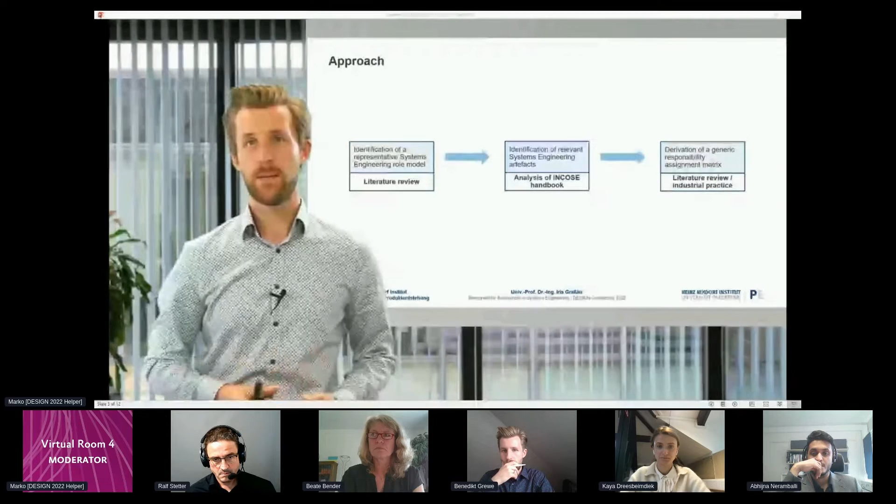Within our approach, we started in three steps. First, we identified a representative systems engineering role model on the basis of a broad literature review. In a second step, we identified relevant systems engineering artifacts, doing an analysis of the INCOSE handbook. In a third step, we derived a generic responsibility assignment matrix based on a literature review and our industrial practice.

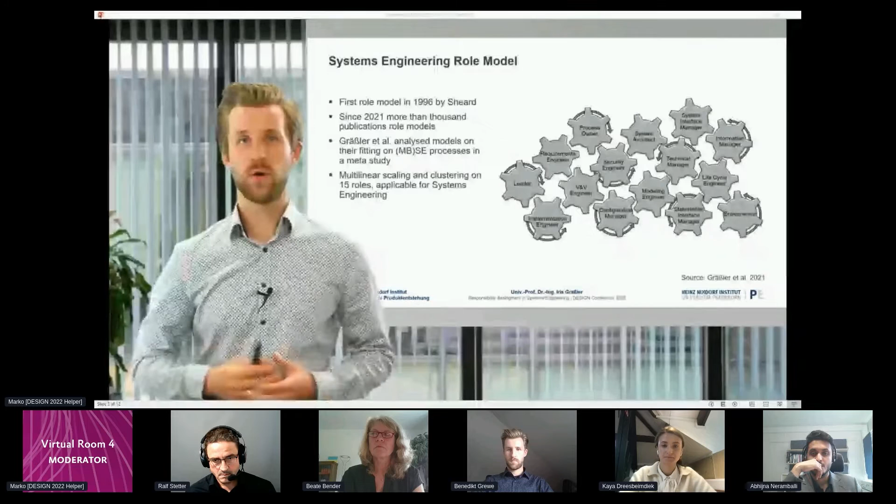The first systems engineering role model was published in 1996 by Sheard. Since then, there have been more than 1,000 publications of role models. Gräßler et al. analyzed different models on their fit with model-based systems engineering processes in a meta-study, and with multilinear scaling and clustering, they came up with 15 roles applicable for systems engineering.

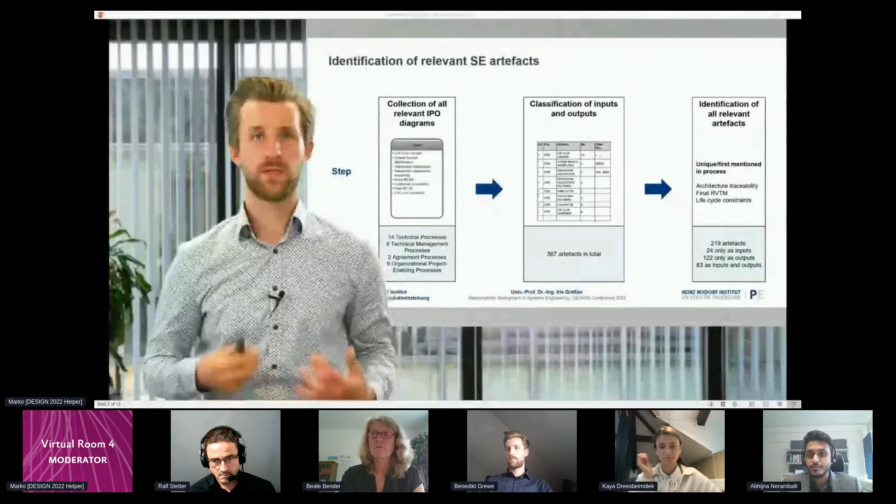To identify all relevant systems engineering artifacts, we used the INCOSE handbook to collect all the relevant IPO diagrams regarding the systems engineering processes. Based on this, we extracted all the artifacts from these IPO diagrams, and then identified just the relevant artifacts out of 367 artifacts in total, getting rid of duplications.

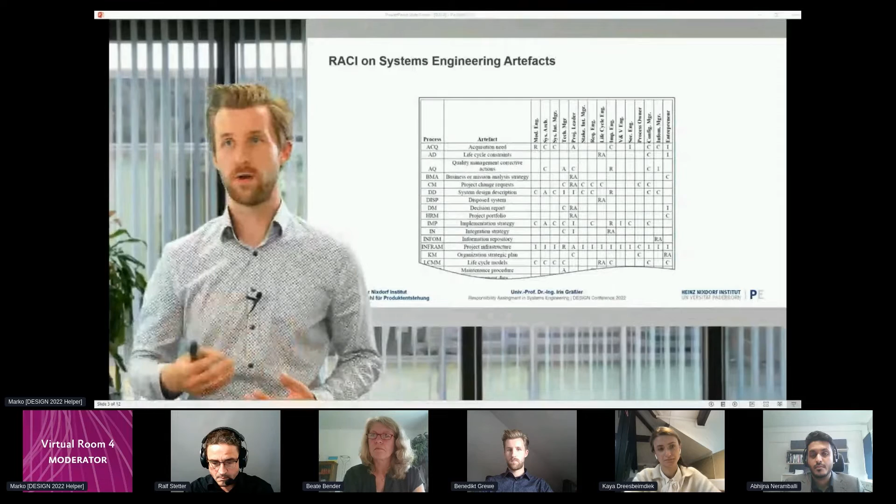In the third step of our research, the responsibility assignment is performed. For each role, either a responsible, an accountable, a consulted or informed, or none of those is filled in the field using the letters R, A, C, and I.

The evaluation of our research is done in two steps. In the first step, we performed a cluster analysis on our matrix, and in the second step, the results are reflected in an ongoing systems engineering transformation project. What we see so far is that the first and the fourth cluster are the only clusters that contain only one role, the technical manager and the project leader.

The second cluster consists of three roles: the systems architect, the implementation engineer, and the configuration manager. The third cluster contains all remaining roles.

We can show that cluster 1 and cluster 4 are quite far away, and this is consistent with the actual tasks of the two roles, which are completely different. The project leader is more into the organizational perspective, while the technical manager represents more the technical view on the system.

The remaining roles are divided into two clusters. Cluster 2 contains all roles which are mostly consulted in the field of the architecture roles, so we could call it the architecture team. Cluster 3 contains all remaining roles, representing the specialized roles in general.

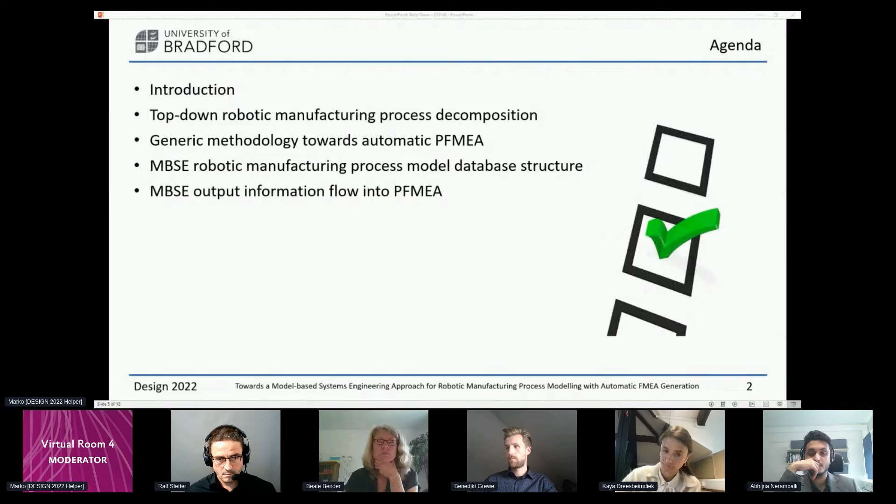So let's start with the introduction. Failure modes and effects analysis, in short FMEA, is a well-known method to support systematic analysis of a product or process to identify potential failure modes and plan for robustness measures, including robust control plans for a manufacturing process at the design stage.

However, with traditional FMEA methods, there are several issues associated with them. They're labor-intensive, often unstructured, time-consuming, subjected to errors, and difficult to keep up to date and interpret.

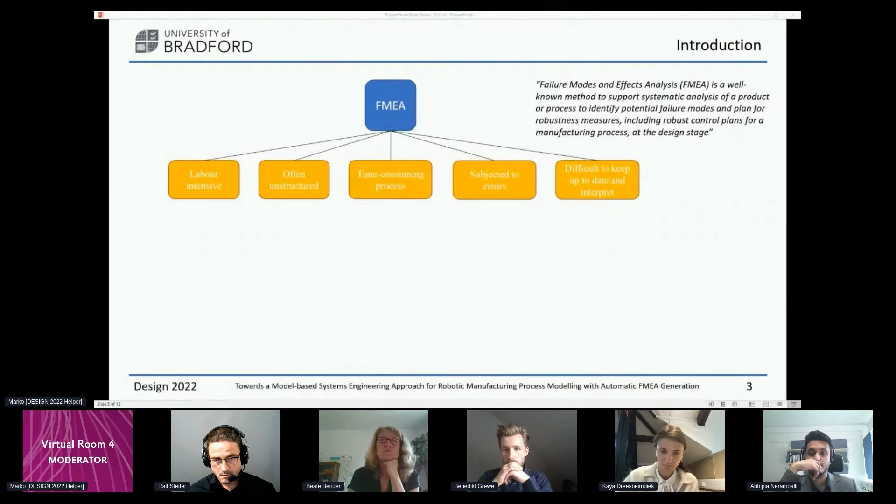As a result of this, FMEAs are often regarded as a deliverable to the customer rather than a tool that can be used by engineers to influence design decisions.

The underlying idea of this work was to address all of these issues and propose a model-based systems engineering assisted automatic FMEA generation methodology. As a result, two main aims were defined for this project.

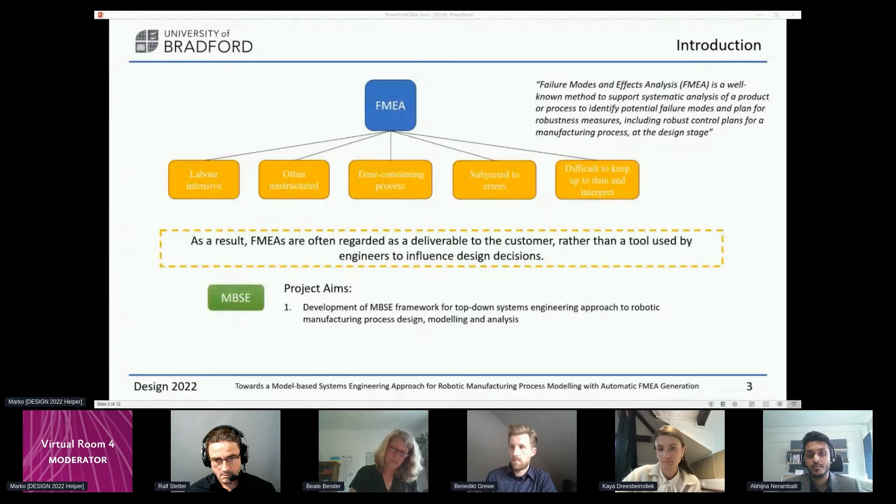First, the development of the MBSE framework for a top-down systems engineering approach to robotic manufacturing process design, modeling, and analysis. Second, the automatic generation of the PFMEA from the developed model.

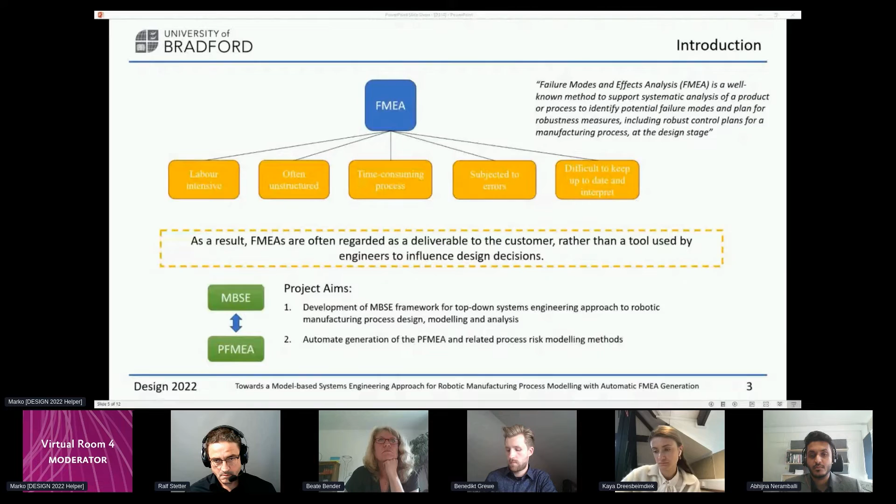MBSE framework development was supported by a case study, which was a robotic manufacturing process. However, prior to MBSE model building, it was important to establish a process decomposition technique.

For this purpose, a top-down approach was selected, involving three key levels. The top level is the process level, which essentially involves the process itself. The next level is the operational level, which involves all the general operations of the manufacturing process and the sub-operations they split into. The machinery level is the deepest level, involving the operations at the actual machines.

It is important to note that for each of the process flow steps, critical characteristics were assigned. This way, a cascade of critical characteristics is formed when all three levels are combined.

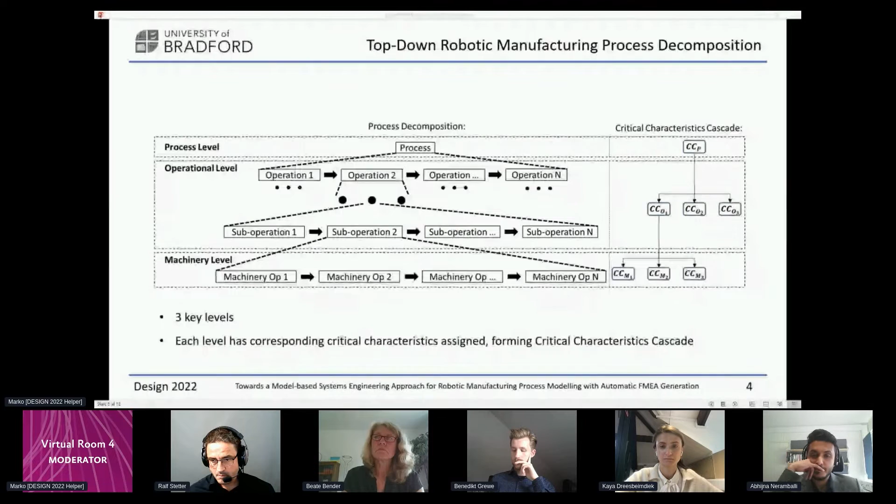Once all the levels are established, it is possible to generate MBSE models around them. Despite the fact that the database structure for the MBSE model is going to be discussed in the next slide, it is necessary to give a brief introduction on how it is formed in order to understand the concept. The MBSE model as an input gets a lot of information from domain expert knowledge, which comes mostly in the form of SIPOC. SIPOC is the abbreviation for suppliers, inputs, process, outputs, and customers.

It's essentially a tool, a spreadsheet, which possesses all the relevant information regarding the process steps involved from beginning to end. This includes all the characteristics and specifications. So SIPOC allows us to establish the process flow information within the model.

In addition to that, domain expert knowledge is also used to define something that we call the ontology dictionary. The ontology dictionary is essentially a database for the elemental operations regarding the possible failures that can occur with these operations. So this way we can define the failure modes.

Now, in order to implement the automation, the concept of the failure chain has been employed, which was presented by the AIAG VDA. The failure chain concept essentially shows the link between the failure mode, the failure cause, and the failure effect. So if we implement this concept across the multiple levels which we have, we can establish the link between the failure modes and the failure cause on different levels.

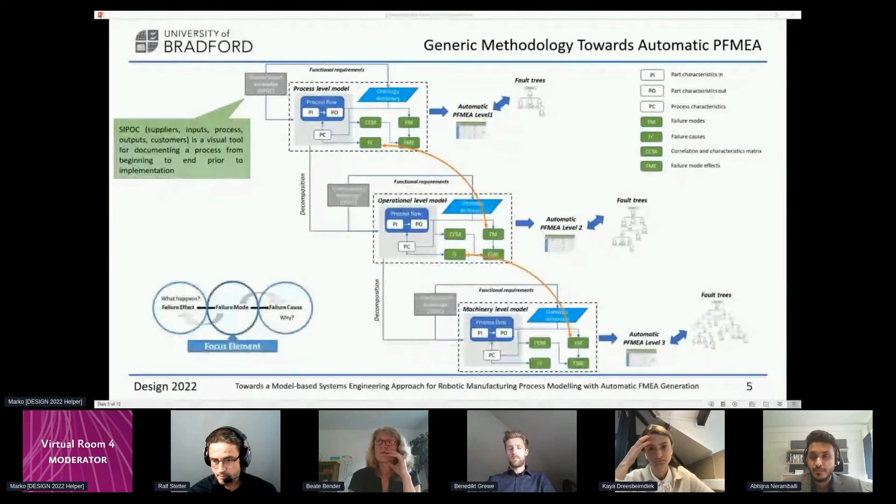MBSE model database structure is composed of four main fields: engineering knowledge, involving SIPOC and ontology dictionary; process architecture, which includes the process step information within the model; characteristics, which is the part-in part-out process characteristics and characteristics correlation matrix; and failure modes analysis, which includes information about the failure mode, fault structure, fault tree, and failure effects.

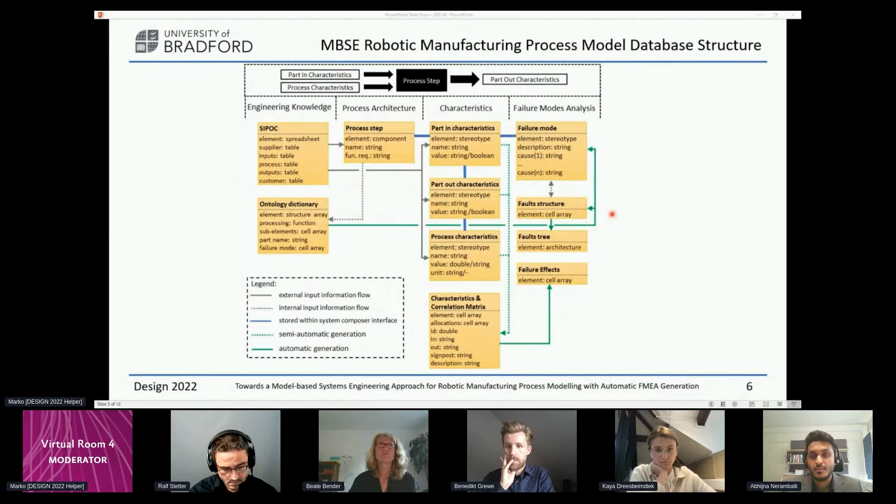Due to time limitations, I cannot go through a deep explanation of how everything is formed. Please refer to our publication for more information on that. However, this slide shows simplified information flow through the MBSE model and the output into the PFMEA.

So we start with the SIPOC, we extract process architecture information from it, and out of which we can straight away generate the process functions requirements column within the PFMEA.

Also, we process the information from the process architecture to the ontology dictionary and generate the failure modes and causes information, which feed the potential failure mode and potential cause columns in the FMEA as well.

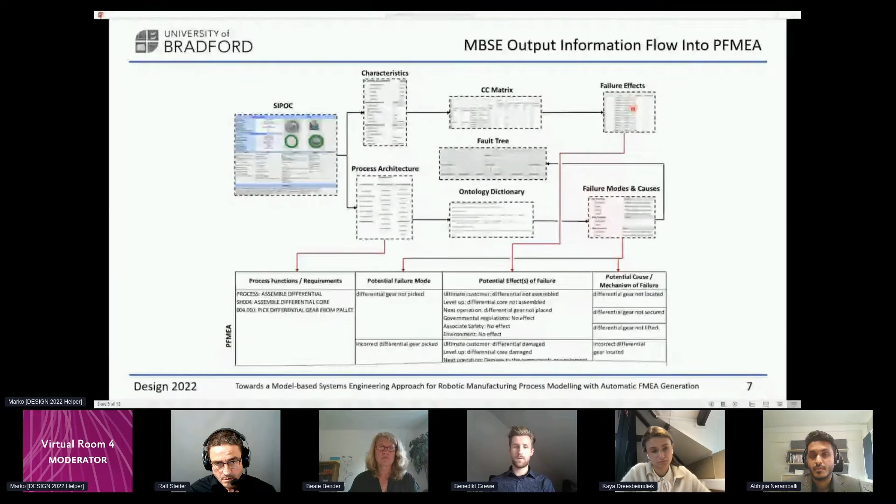Also, from SIPOC, we extract the characteristics, process them to the CC matrix, generate the failure effects, and fill the potential effects of failure column within the FMEA as well.

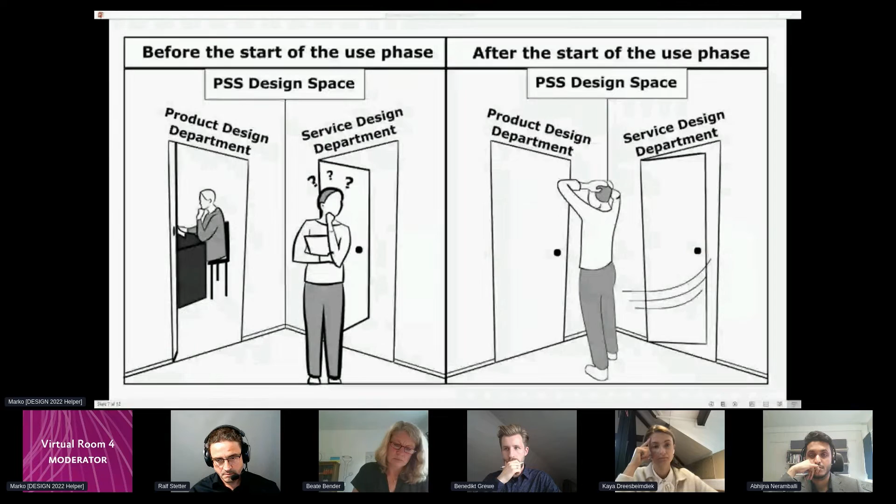This is due to the potential mutual dependencies of products and services. Even though there is a higher flexibility on the temporal dimension for service design, it is often not optimally used in practice. Either too many or even too few decisions are made for the service design at the end of product design. We refer to this phenomenon as falling into the service design trap.

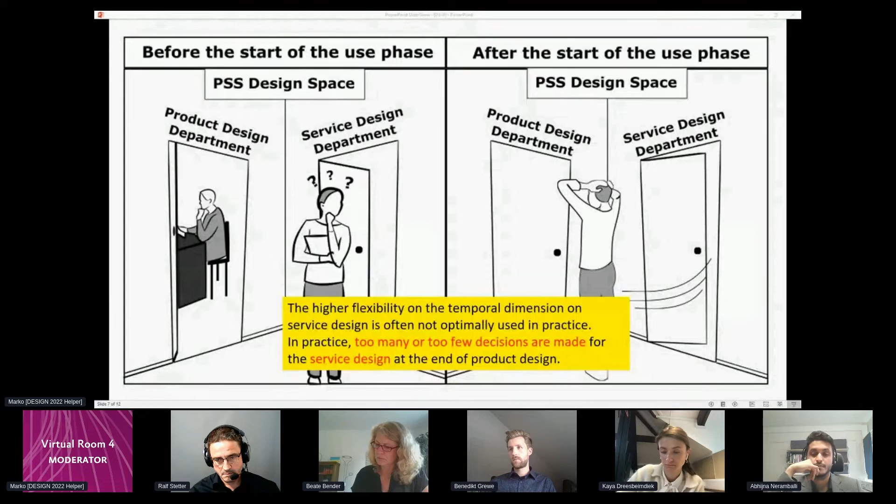In order to help designers avoid falling into the service design trap, we have developed a product service dependency matrix. This matrix is the result of a knowledge base that we have developed through a scientific review of multiple journal papers, where we were able to document around 42 cases of product service dependencies or integration across multiple industrial sectors.

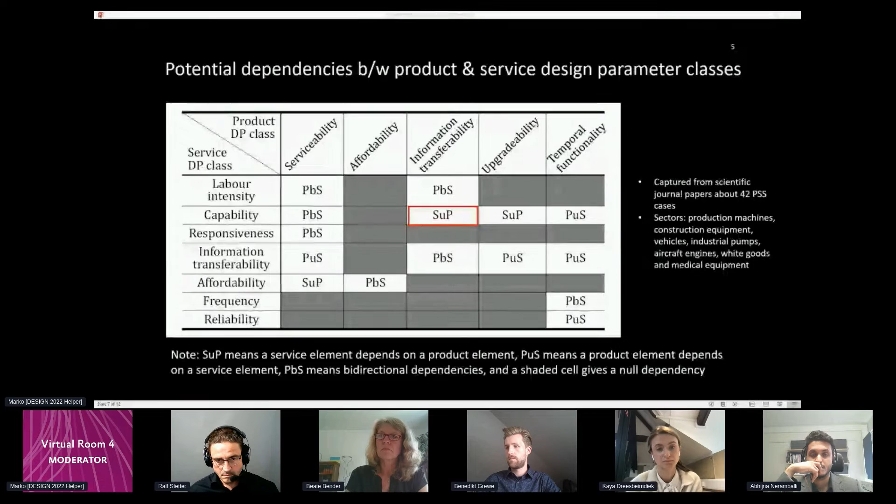To elaborate, I can give you an example. Here we can see that capability or service capability is unilaterally dependent on information transferability of a product. We found in multiple cases that by installing certain sensors and IoT devices, the products could transfer information regarding the overall product systems from the use phase to service technicians who could effectively design their predictive maintenance. Therefore, here there is an SUP dependency between service capability and information transferability.

This knowledge base and the concept of service design trap was validated by applying it to a real case with the company Alpha. Managers from product design, service design, and sales were involved, and these managers reflected that several of the dependencies identified in the knowledge base are relevant for their own product service system. Although several of them were already exploited by the managers and designers, some were considered to be more worthy of a thorough investigation.

They also reflected that there were multiple occasions where they had fallen into the service design trap, where the service staff had to cut through a huge complex product in order to access a critical component deep within the product, so that they could carry out the service that had been promised. The concept of the service design trap and also the knowledge base was useful for them to identify and prioritize important dependencies, and also useful to provide pedagogy to less experienced designers. Currently, a formal way of taking account of such issues was missing in their existing design process.

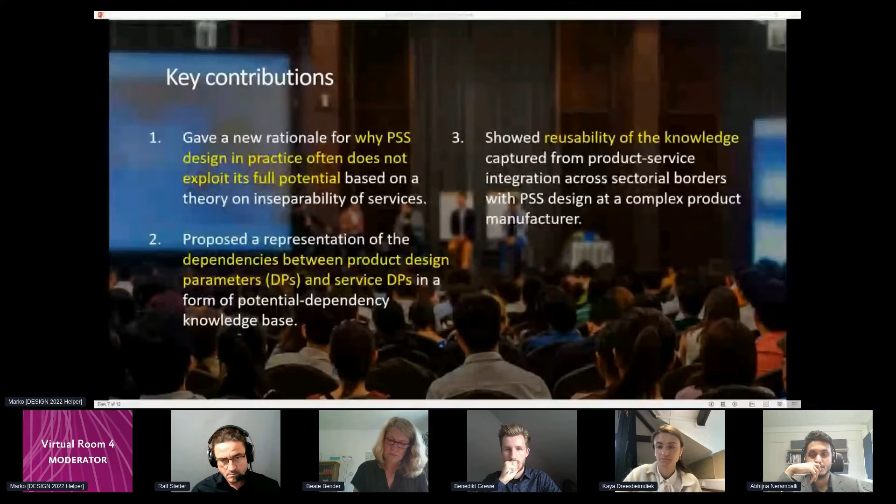To summarize the key contributions of this paper, we have provided a new rationale for why PSS design in practice often does not exploit its full potential, mainly based on a theory of inseparability of production and use of services. We have also proposed a high-level representation of dependencies between product and service design parameters in the form of the potential dependency knowledge base. We have also shown reusability of the knowledge captured across multiple product service integration cases from different sectors by applying it to a real case of PSS design at a complex product manufacturer.

We have recently published a journal paper that shows the application of this knowledge base to a different case of PSS design, again at a different complex product manufacturer. In order to access the latest version of the knowledge base, please visit this paper.

On the functional level, if we want to have a design which is tolerant to faults, which can accommodate faults, which are inevitable in complex systems, then it's helpful to have a transparent functional architecture, to use functional diversity, functional redundancy, and domain-spanning functional solutions.

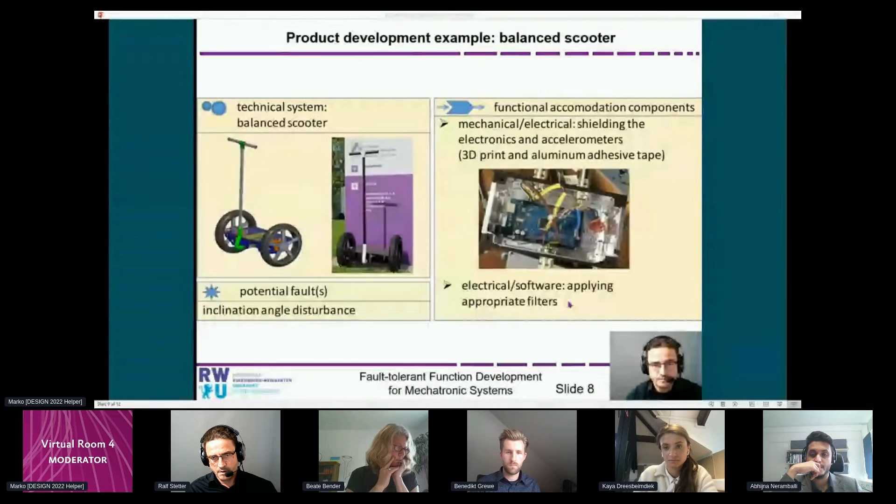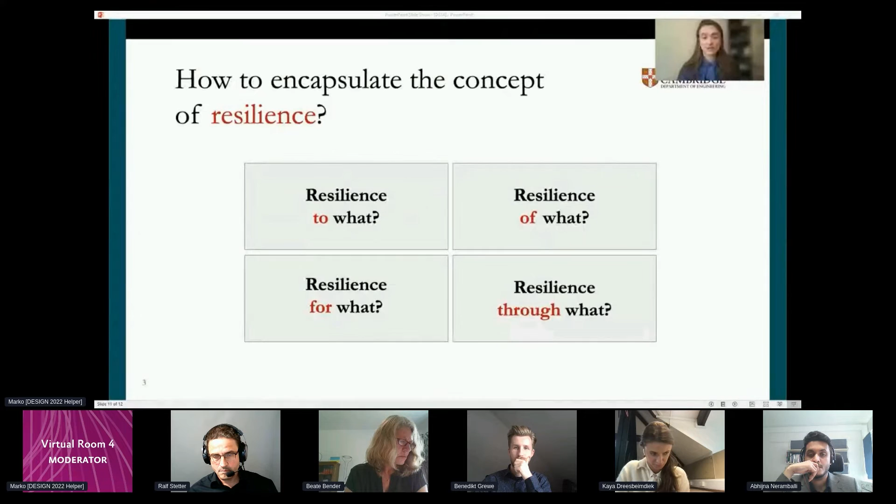When approaching resilience theory, a good way to start is to ask 4 related questions. Resilience to what? Resilience of what? Resilience for what? And resilience through what? In our paper, we present a framework in which we want to contribute in particular to the 2nd and 4th question. We made several observations that have implications for today's systems resilience and that we try to capture with our framework. Let me quickly guide you through the most important ones.

First of all, today's systems are highly interconnected and interdependent. For example, the COVID pandemic did not only present a severe risk to healthcare systems and the well-being of people, but also economic and political systems. Therefore, a systems of systems approach to resilience offers ways to conceptualize complex systems that are characterized by alternating states, subsystems, and nonlinear transitions.

Second, these systems of systems that I just mentioned do not only need to cope with singular shocks, but there exists a wide range of possible change patterns and disruptions that can entail positive and negative consequences alike. Also, systems of systems are never fully complete and behave evolutionary. Hence, we decouple resilience as a primary system property and rather define it as a design process.

Finally, recent crises have shown that similar systems can differ significantly in their ability to cope with disruptions. Also, the ways in which such resilience is achieved depends on the system and its particular environment. From this observation, we learned that for resilience, there's no one-size-fits-all solution. Instead, the local context is crucial. This highlights the importance of a definition and framework that can be flexibly tailored to the system or systems of interest.